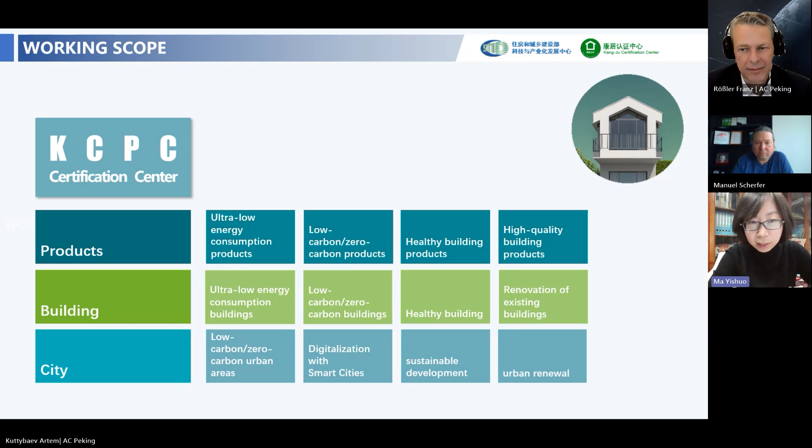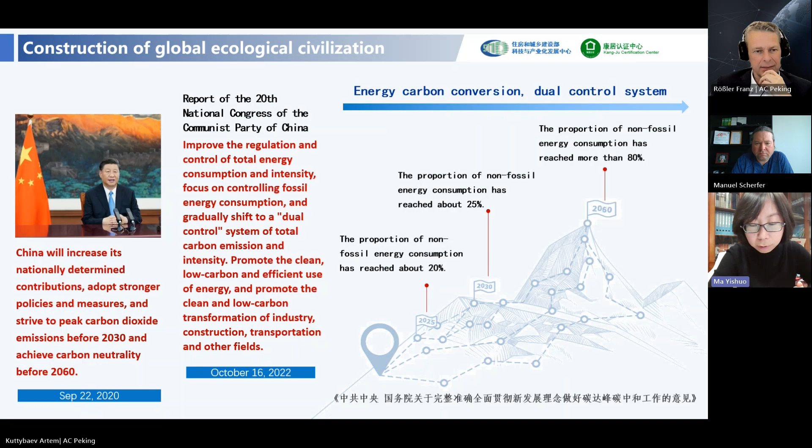From the perspective of the country's development situation, China is an important participant, contributor, and leader in the construction of global ecological civilization, and has proposed the strategic goal of carbon peak and carbon neutrality in 2020, putting forward quantitative targets such as the proportion of non-fossil energy consumption.

Specifically in our industry, the carbon emissions from the entire construction process are 5.1 billion tons of carbon dioxide, accounting for about 50% of total national carbon emissions. The carbon emissions from building operation are 2.2 billion tons of carbon dioxide, accounting for about 21.7% of total national carbon emissions. Therefore, the carbon neutrality target will unavoidably be decomposed into the construction field.

So I think building energy efficiency is a key driving force for achieving carbon peak and carbon neutrality. I cite right here three words: trend, effectiveness, and quality. I think energy efficiency is a big trend of construction development in China, but we have to make it very effective - that means we must not just say it, we must do it, and do it to a high quality.

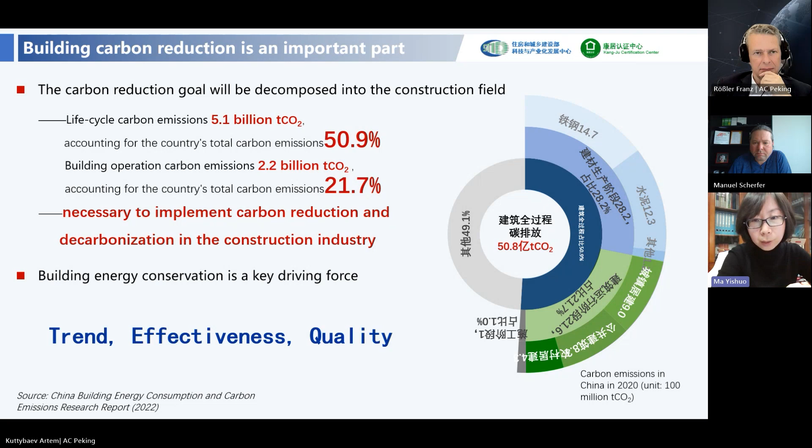Our Kang-Ju Certification Center is the earliest and most important leader and promoter of ultra-low energy consumption buildings in China. Since 2011, under the witness of the governments of China and Germany, we and the German Energy Agency, as the executing agencies of both sides, have been promoting the development of ultra-low energy consumption buildings in China. In 2013, the first batch of demonstration projects began to be implemented.

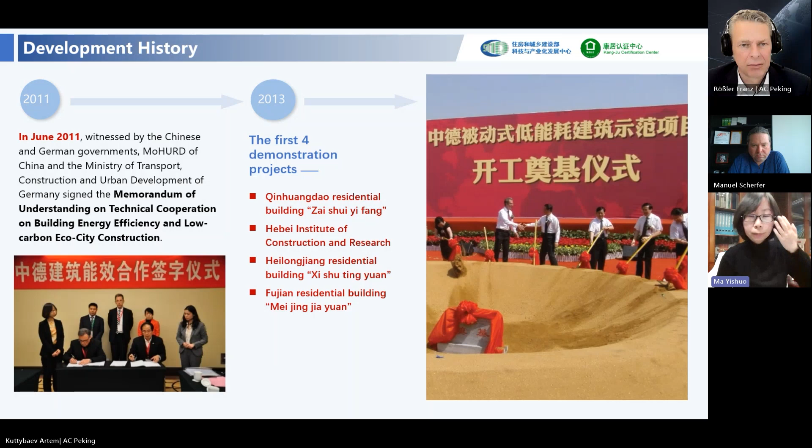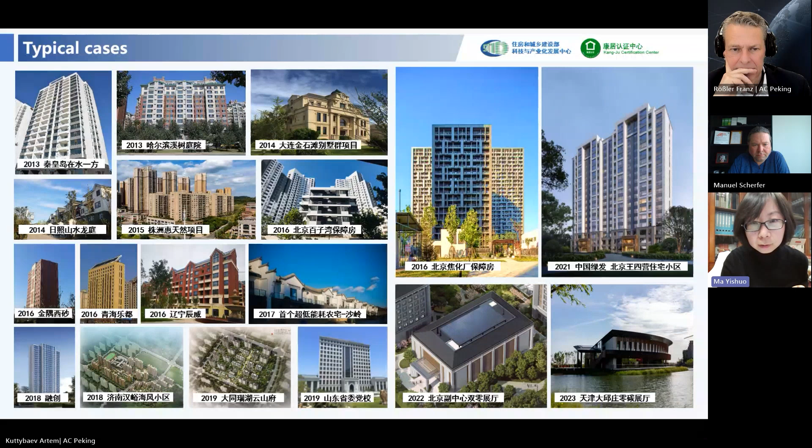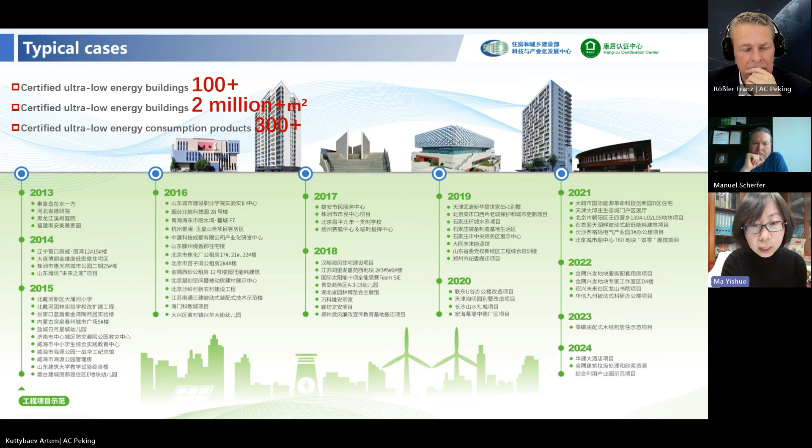So far, we have built over 2 million square meters of ultra-low energy consumption buildings and certified more than 300 products suitable for this kind of building, achieving significant development in policies, standards, technologies, and products.

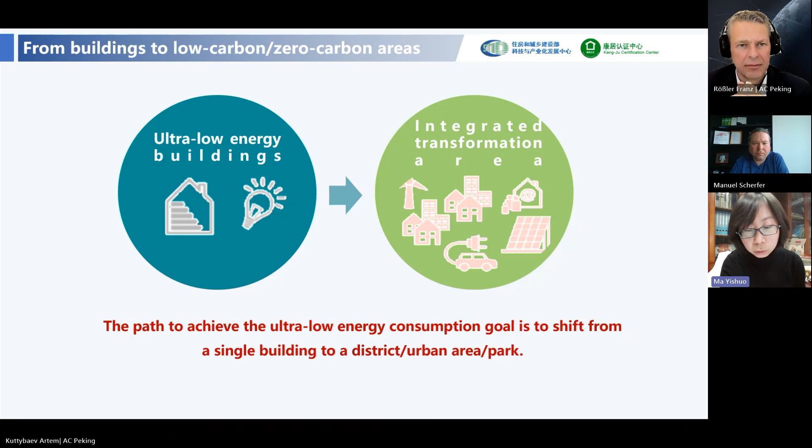With the technological foundation of our 15 years of high energy efficiency buildings, the current trend of low carbon development in China is to focus on urban areas. That is, the path to achieving the low carbon target has shifted from individual buildings to urban areas.

In January last year, Xiong'an, a new city in Hebei province, announced the construction of a model city for green development. In February last year, the Beijing Urban Subcenter in Tongzhou district announced that it would be built as a national green development demonstration zone. Subsequently, in August, the Sino-Singapore Tianjin Eco-City in Tianjin announced its intention to be built as a national green development demonstration zone as well.

It is worth mentioning that starting from 2022, in order to promote low carbon development, the MoHURD and Hainan provincial governments jointly established the Boao Zero Carbon Demonstration Zone.

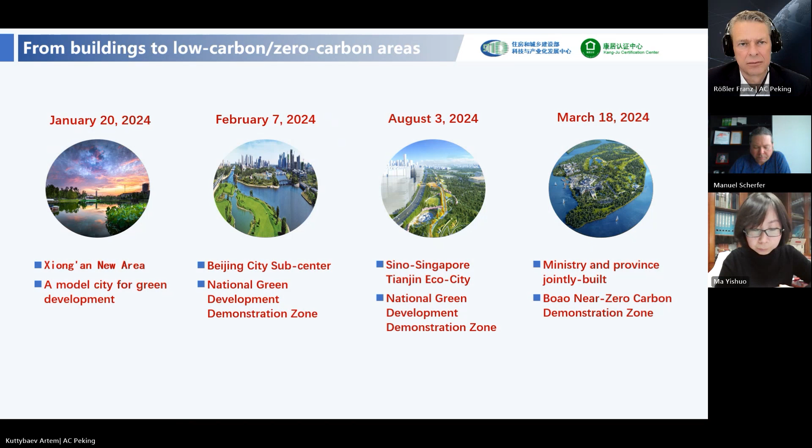The demonstration area in Boao includes Dongyu Island, an organic fruit and vegetable supply base for agriculture and photovoltaic complementation outside the island, a material recycling treatment facility, and 2 green transportation connection stations. Following the 4 major construction concepts of regional near-zero carbon, resource recycling, natural environment, and smart operation, 8 types of low carbon technology integration have been carried out.

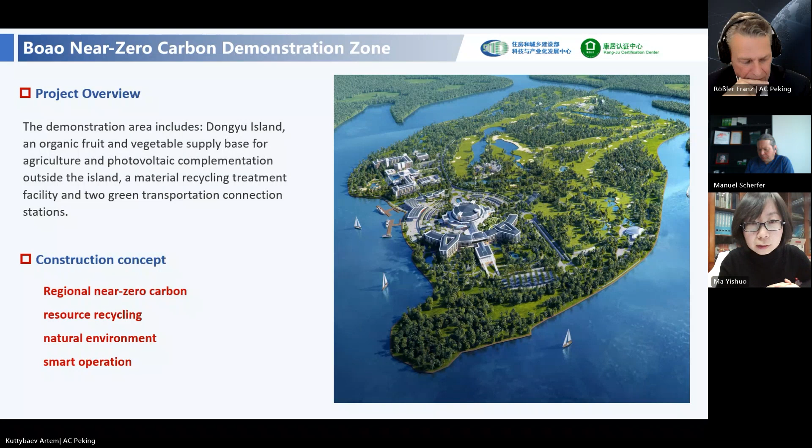18 renovation projects have been completed, including ecological transformation of garden landscape and low carbon renovation of buildings, utilization of renewable energy, construction of new power systems, green transformation of transportation, treatment of solid waste resources, recycling of water resources, and intelligent operation.

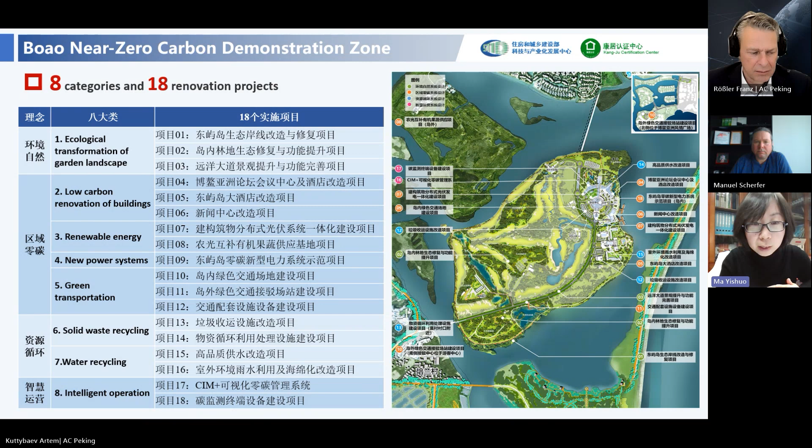After 2 years of construction, the Boao Zero Carbon Demonstration Zone officially entered the operational phase on March 18, 2024. The operation results show that the total renewable energy generation on the island exceeds the total electricity consumption, and the island's power generation can not only meet its own needs but also transmit electricity to the grid.

On March 18, 2025, the working group of Boao decided to change the name of Boao Near Zero Carbon Demonstration Zone to the Boao Zero Carbon Demonstration Zone.

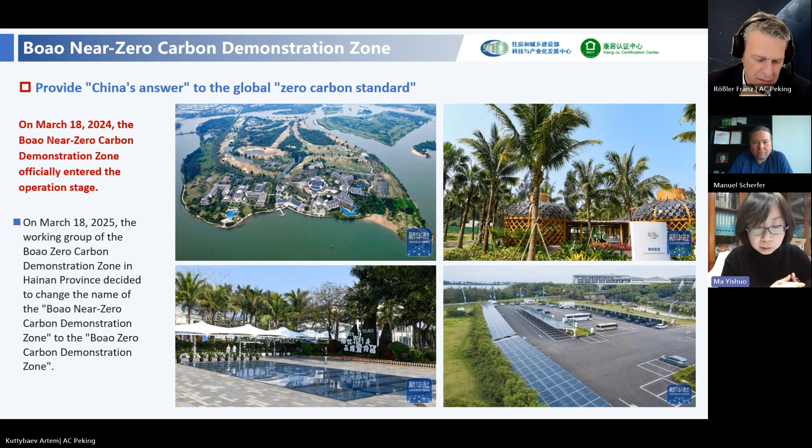In summary, under the background of carbon neutrality, there are 4 development trends in China's urban and rural construction. One is to move from simply improving building energy efficiency to comprehensively enhancing building quality. The second is to develop from ultra-low energy consumption buildings to zero carbon buildings. The third is to shift from new construction to existing building renovation and carry out ultra-low energy consumption renovation for a large number of existing buildings. The fourth is the transformation from individual buildings to integrated low-carbon urban areas.

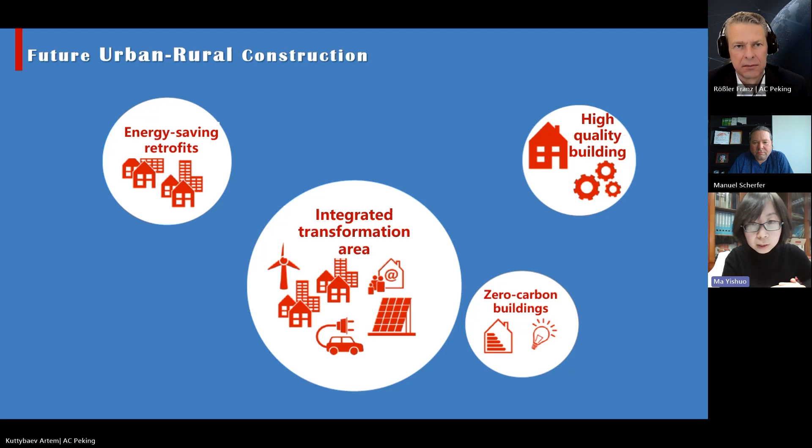In the end, carbon neutrality is China's national strategy and a necessary path for sustainable development, with the transformation of urban energy becoming an important driving force for a new round of technological renovation. We believe that green and low carbon development is also an important driving force for urban and rural construction. That's all. Thank you.

Great presentation, Dr. Ma. Thank you so much. I didn't know 50% is the CO2 emission of the building sector in China. I think we're all in the same boat.

In Europe, we're also talking about districts, not only looking into buildings anymore. Building renovation is a big challenge in Austria and in China too. But it's so good to have Dr. Ma, someone who really opens the doors, shares her experience, and is interested in the best available technologies and cooperation.

For that, we would really like to thank you, Dr. Ma. So now we've got the general big picture of what China wants to achieve and what it has done so far. Now we're going to nail it down a little bit more, how that really works in practice. Mr. Manuel Scherfer will tell us more about energy efficiency design and construction in China, and also share some concrete project experience with us.

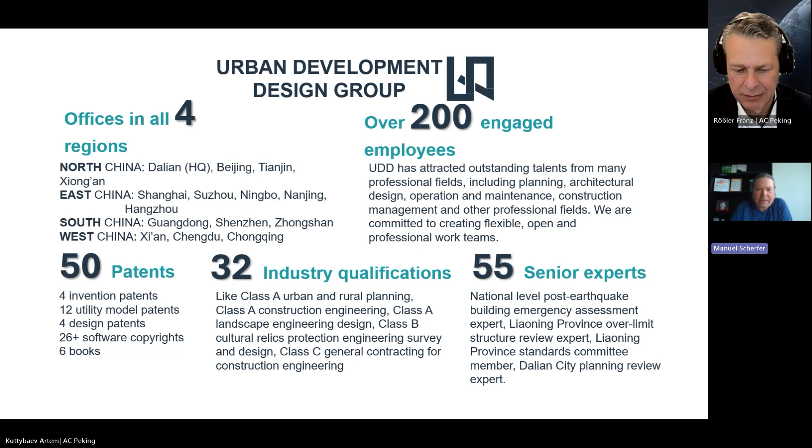I have the obligation to give you a short company introduction. Urban Development Design Group has offices all over China in all 4 major regions, but the headquarters are in Dalian. Dalian is in northeastern China, but I myself, as I mentioned, am just next to Shanghai.

Our company UDD started in the early 2000s, when it was privatized just as a really conventional design institute. Then in the 2010s, we turned into a full-fledged EPC provider, a turnkey service provider. And now the next step for the company is to become a zero carbon building technology company, meaning that in all our projects, across all the different sectors, we will put in as much zero carbon design and energy efficiency as possible.

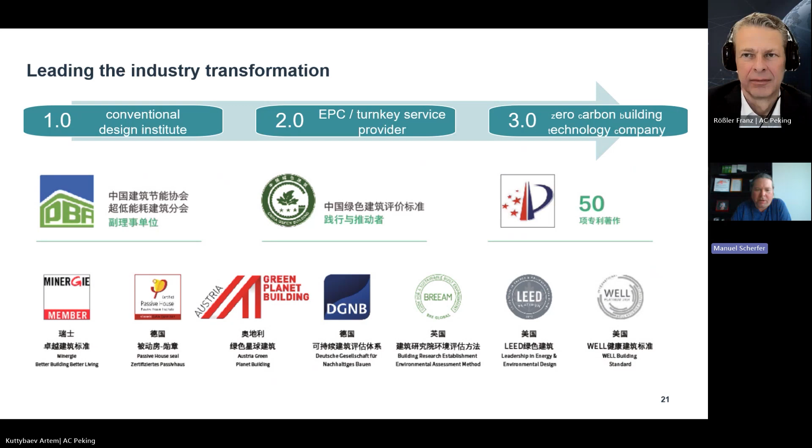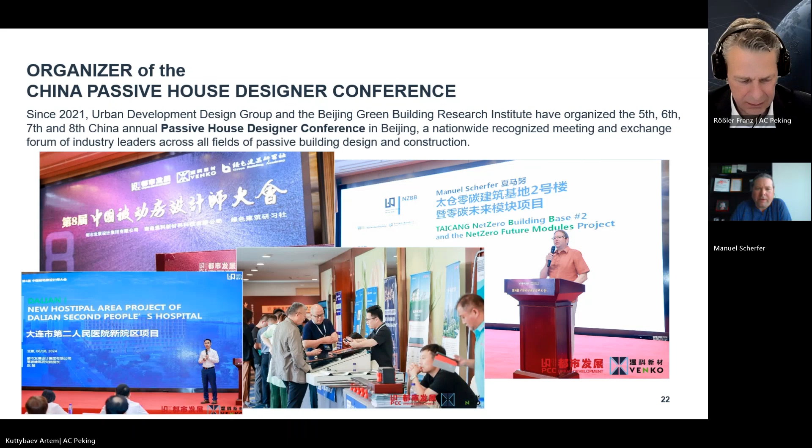We also organize the Chinese Passive House Designer Conference once a year. The next one will be, I think, in November in Beijing. So, so much for the company.

Next is a short introduction of the building I'm sitting in right now. That's the NZBB number 1. NZBB stands for Net Zero Building Base — that's a big name, Building Base, because this site consists of 2 buildings, but only number 1 has been built so far.

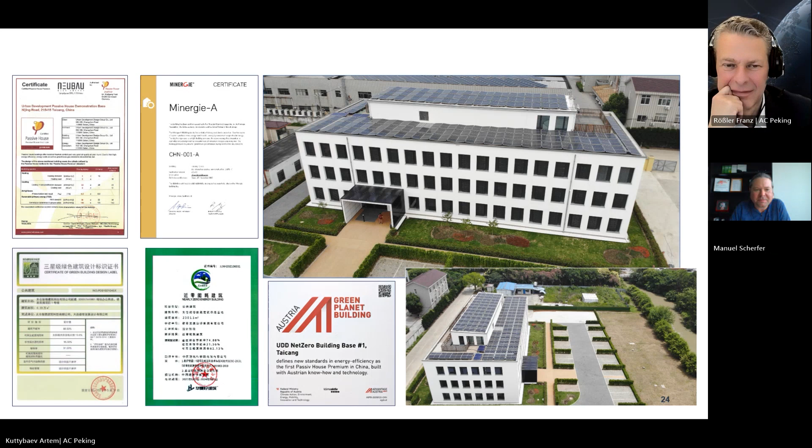I'll give a short overview of some of what I consider core energy efficient technologies, or design principles, that we fulfilled here in this building.

I'll hop through these pretty quickly because for a European eye, this is quite run-of-the-mill and standard, but not so in China. This here is now our plot from above.

The first item here has nothing to do with energy efficiency, but with water conservation, because this whole area is a sponge city. All the water is kept on the plot in the soil, all the surface is water permeable, and where you can see the three arrows, the colors changed a little bit. In my presentation those were blue, but they are all drained, running into a 60 cubic meter cistern. From there they go into a smaller cistern where this water is filtered, and then it is brought back into the building and serves as water for flushing the toilets. That is rainwater reuse.

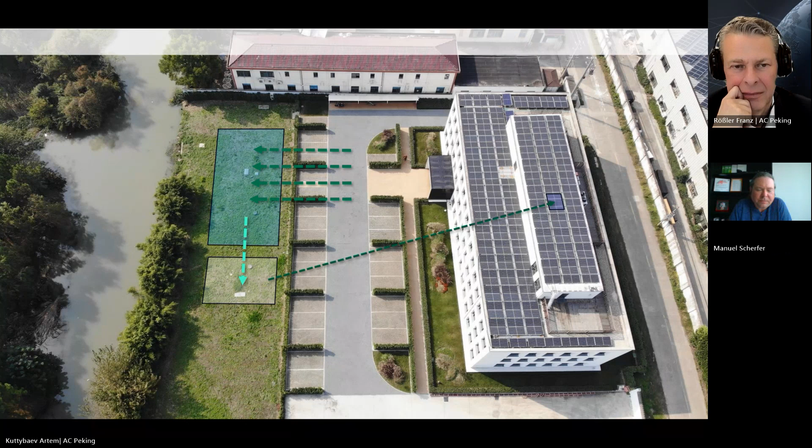Our exterior walls, that's also pretty standard, a classical ETICS system. We have 200 millimeter AAC walls, so that's foam concrete with EPS insulation in two layers, 200 plus 150 millimeters, and this brings us U-values of the main building of 0.086, and the technical room on top of 0.16 watts per square meter Kelvin.

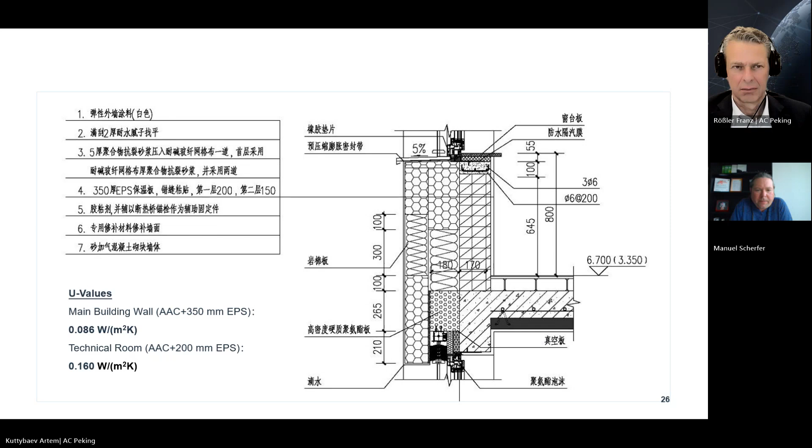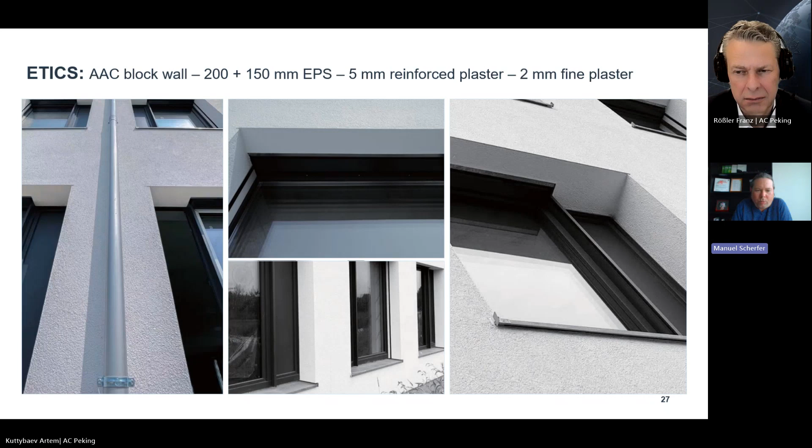This is a more detailed look where we put special attention during construction to have all the design details also put into place, like these strip profiles. If any of you have been in China before, these kind of exterior wall systems are not often seen, and not in this quality. We're pretty happy, and it's still white, as maybe not the first day, but the third.

Heating and cooling is done with a TABS system, a thermally activated building system. This is also quite standard, especially in public buildings in Europe. We have 250 millimeter strong concrete floor slabs. Right in the center are water pipes, fed with cold water during summer, warm water during winter. What makes them so energy efficient is the relatively low temperatures during winter. The supply water temperature is given as 30 degrees, but actually it's more like 27, 28 during winter. In summer, where we have the most energy demand for cooling, the supply temperature is 18 degrees, and we cool down to a room temperature of around 24 degrees. So this small delta makes it energy efficient.

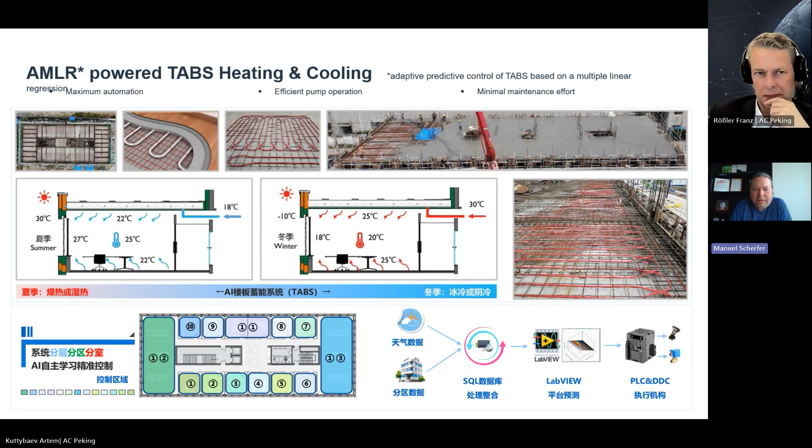The other specialty here is our control and steering system, an algorithm that predicts what each of these TABS zones, each pipe of a single office space, needs for the next day. The circulation pumps run only for a few hours, 3, 4, 5 hours, and then it is turned off. For the rest of the 10, 12, 13, 14 hours, it's just passively radiating heat or absorbing warmth during summer. That's how we gain a lot of energy efficiency.

Let's look into our technical room. Then we have the AHU, the air handling unit, designed for our climate here. I have to specify a little bit - we're in what in China is called the climate zone of hot summers and cold winters. But cold winters here means we have a couple of weeks during winter where it's around 0 degrees, maybe sometimes -3, -4, -5, but usually it hovers around 0 degrees. So that's given as cold here, not as cold as in Austria or Germany.

The outside air, shown by the green arrow, comes in and passes through the first heat recovery rotor. In summertime, with say 35 degrees air temperature, this will pre-cool it down a little bit. Next is the cooling coil, where dehumidification happens, which is badly needed here. In summer, even at temperatures around 35 degrees, we still have relative humidity of the outside air over 80%, so a lot of water has to be removed. We then get very dry but also very cool air, only 12 to 14 degrees Celsius. We heat this air up again, also using the return air temperature, and it comes out of the second heat recovery wheel at around 20 degrees cool air, which is very pleasant. Then we pass this into our offices.

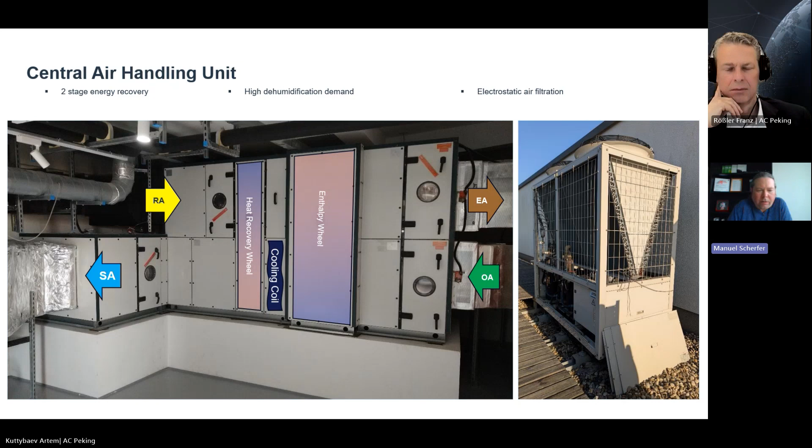Of course, external shading, all fully automatic, also developed by ourselves. And then we have on the left our small weather station, which is important for our TABS control system.

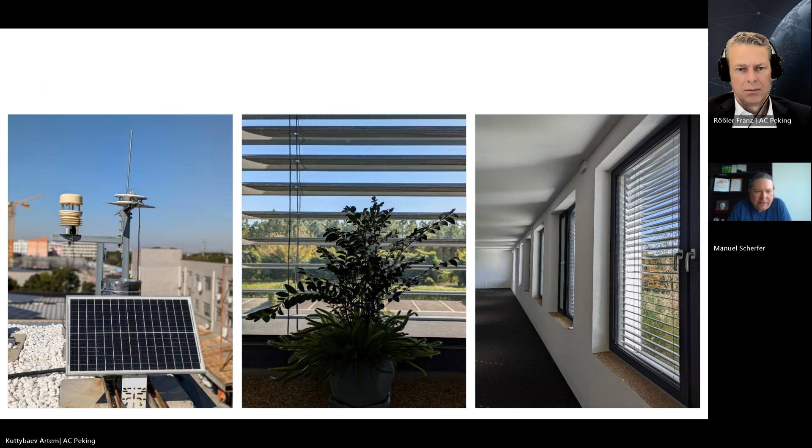Now the third point: this building has been in operation for about 2 years, a bit more. We built it during COVID with more than 80% locally sourced materials, technologies, and construction workers. So it is not like in the past that these high performance buildings need to be very expensive and need a lot of imported foreign technology. The China market can now provide most of these, and in very good quality.

So the question is often, why are not more buildings built like this? And a lot of buildings are just not like this. And why? I scratched my head, and then I found a document.

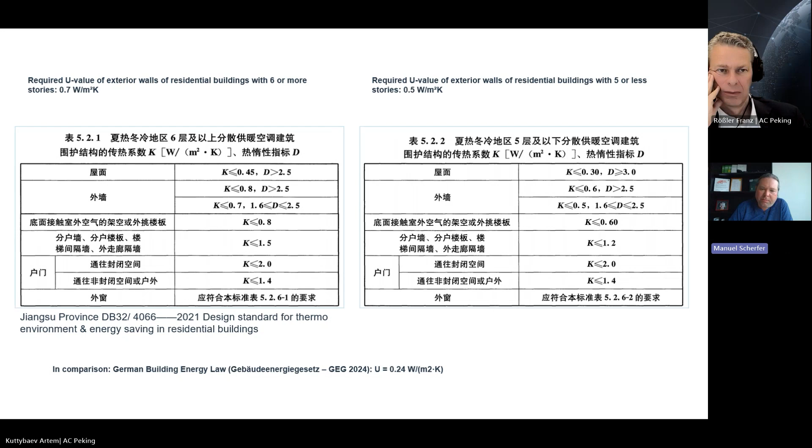If we compare it to the current German building energy law standard, which is the baseline in Germany for new buildings, the U value has to be 0.24, so much lower. But anyway, in China, at least small buildings 0.5, or higher buildings 0.7.

The other figure is the U value required for windows, which I picked out. There are a lot of numbers, but in general these have to be at least 1.8 to 1.6 or lower. So it is not a very high target, to be honest. Again, the German standard requires 1.3.

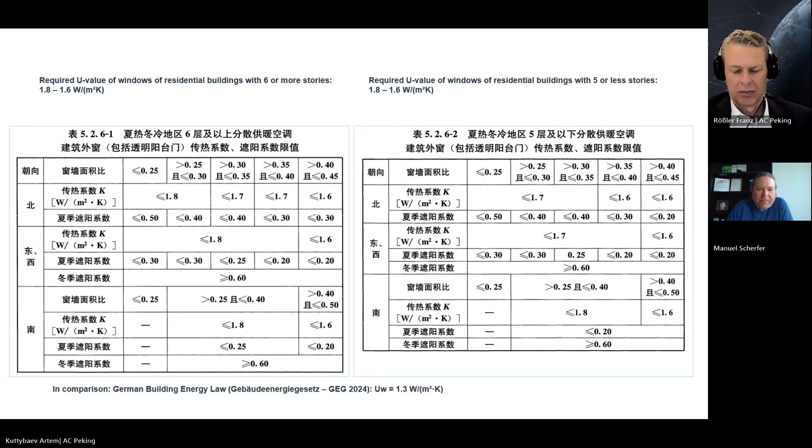So how can this be? What they currently do at this construction site is finish the exterior wall with aluminum cladding, so there will not be any insulation.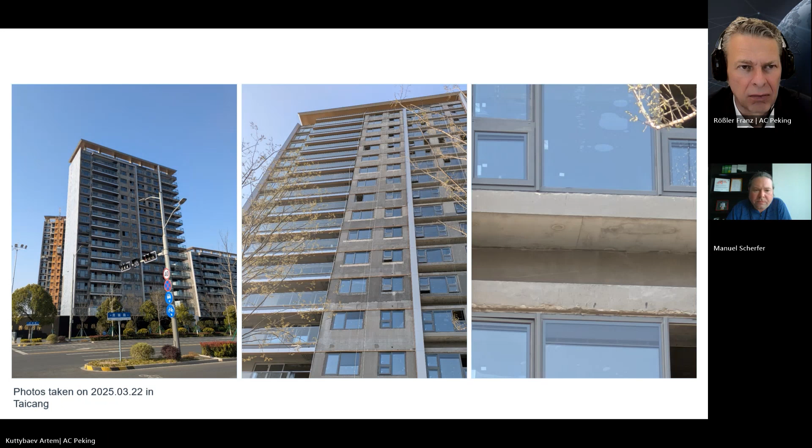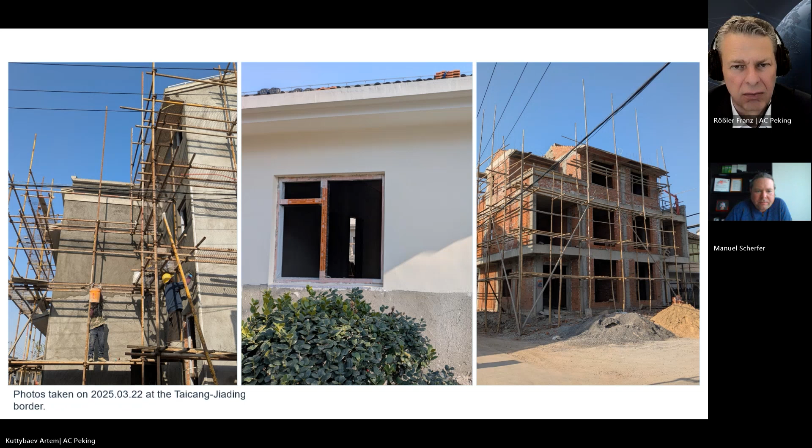So the question is, there might be a possibility - it could be a really thick, massive wall. With growing thickness, you can reach a U value of, let's say, 0.67 without any additional insulation. But this photo here, if you look closely, surely proves this is a 240 millimeter wall, because that's the length of the brick.

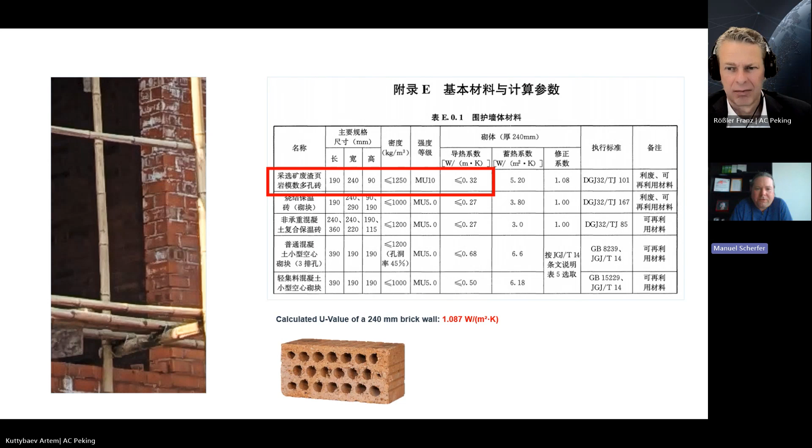I calculated this - I took my PHPP calculation and put it in, and that comes out to a U value of 1.087. So clearly not 0.5, or even 0.7 or 0.8, right?

So the question is, how can these buildings be legal? I asked my colleague, and she said there's one possibility: if a local standard is more strict than the national standard, someone could opt for the more lenient national standard. But that's just hearsay. Next, please.

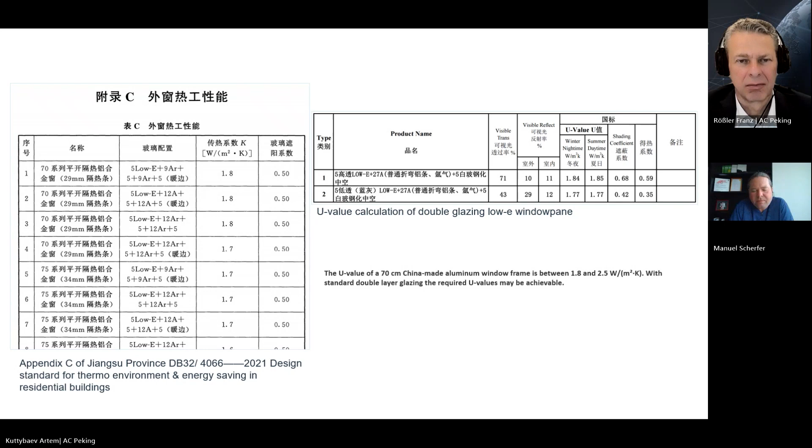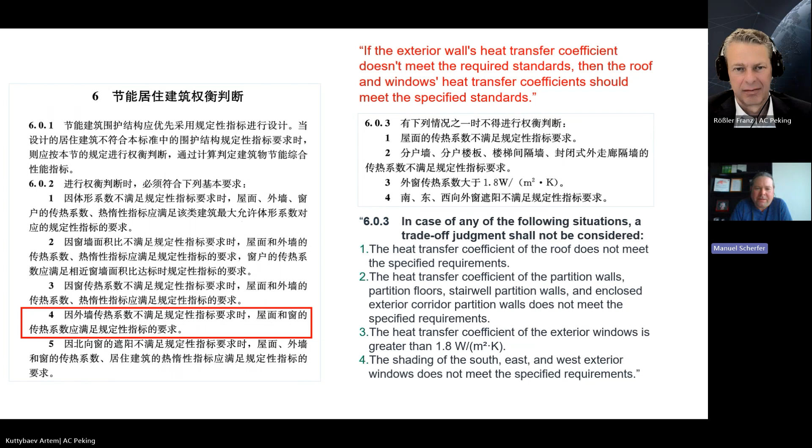Yeah, and that leads still to the question - the standards are there, the requirements are there, but how people find these loopholes to circumvent them, I just have no clue. The colors here are a little weird - they were different in my presentation, but it doesn't matter.

I have a couple of friends who bought new apartments, 2 or 3 years old. They all have nice amenities like ground heating and fresh air systems - everything nice. But during winter, the apartment doesn't get warm. During summer, it doesn't cool down. And the heating and cooling bills are about the amount you would pay in Germany, where we have 5 times higher energy prices. That's the reality.

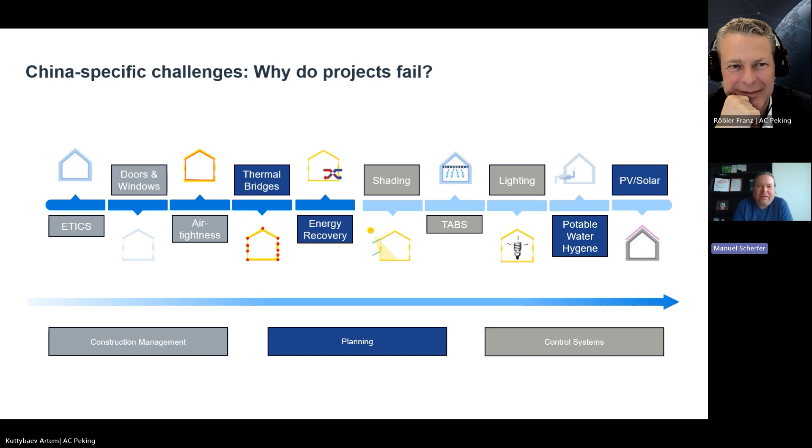If anyone has an idea how to correct that, I'm eager to hear. But I hope we have a lot of discussions later on. You can find me by email. We can have a virtual tour here in this building and continue the conversation. I thank you very much. Next slide, but that's only the bye-bye.

Thanks so much, Manuel. So where is the regulation side you portrayed - but in reality, maybe also like in Austria sometimes, but in reality it looks quite different, you know. It was very, very interesting to see this first-hand experience of building projects.

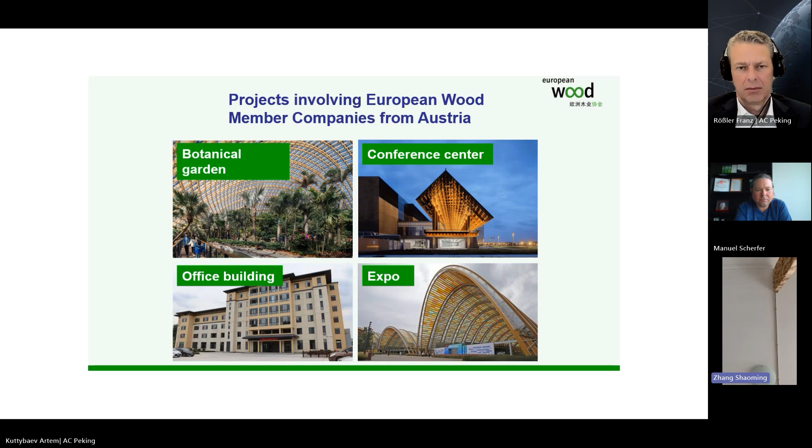Some scales are even bigger than some European countries. I mean the highest and the span, like the last one, the Expo, it's almost 120 meters span, very, very long.

Just some detail, have a close look at some of the projects I mentioned. On the last page there's the office building in Shandong.

This is the botanic garden in Taiyuan. It looks very attractive, and reportedly has a lot of visitors every day at this site. It's a very large span glulam structure.

There's the Expo project just finished 3 years ago by Austrian companies. It's a fire pavilion, very interesting and nice looking, with many visitors every day. With these projects, we cannot leave out the support of code and standards.

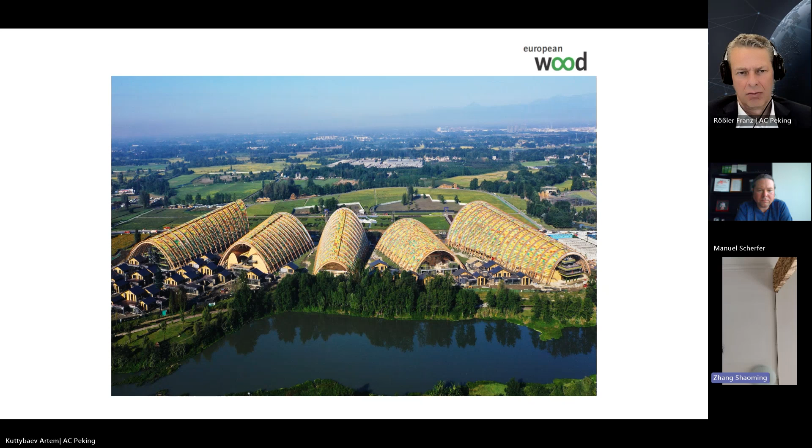So the most important code standard is the fire code. Fire is the key and also the bottleneck for the development and promotion of wood construction in the China market. The new revision, actually the draft, has been finished for 4 or 5 years, but it has not been published, so we have been waiting for that. I hope this year it will be issued and published by the government.

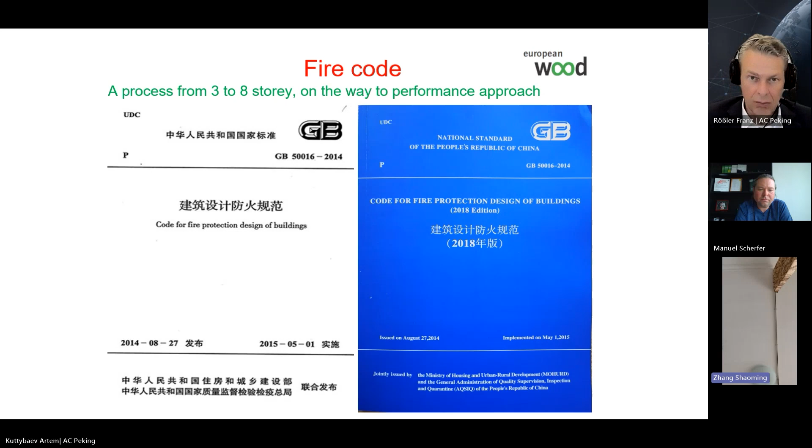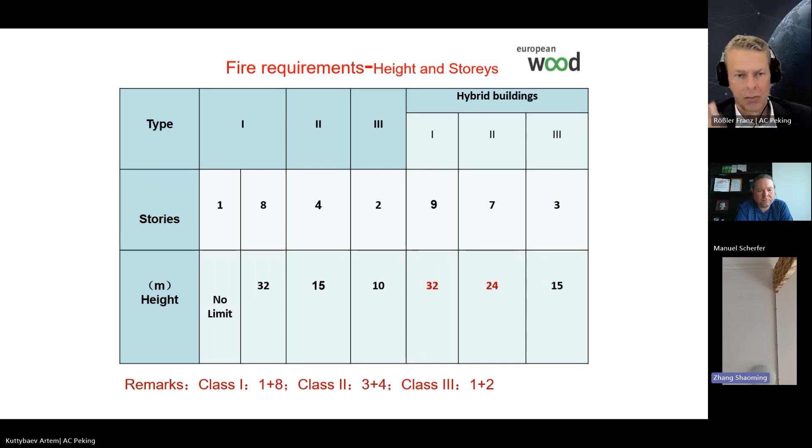So far, the main applications of wood construction in China are for several types: residential buildings, leisure and resort buildings, and complex buildings. We call this part of the public buildings, and this part has been increasing greatly, and at the moment it's the largest part for wood construction. There are also education and sports buildings, and traditional buildings like churches, pagodas, and temples, etc.

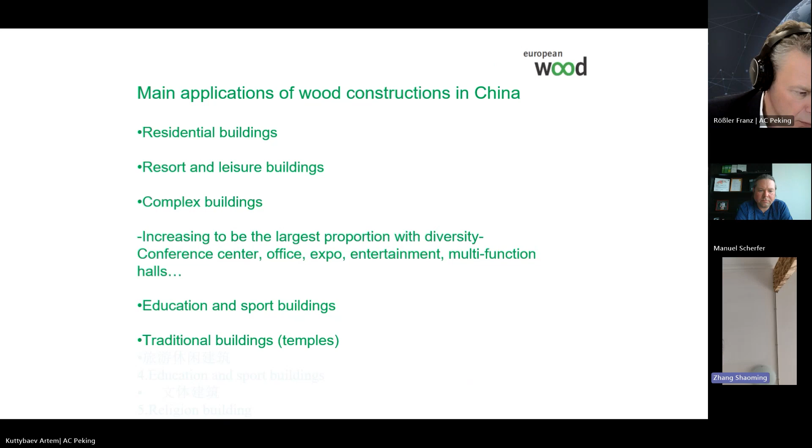We can see that multi-story and high-rise wood construction is still missing, it is in an early stage in China because of barriers and fire regulations. In Europe we use CLT for multi-story and especially high-rise, but the CLT standard in China is not finalized yet. We hope that will come very quickly.

Because of the carbon pressure for China, the government and industry are making efforts to seek new solutions via low carbon prefabrication, hybrid, safe, low energy, green, intelligent, comfort, etc.

Just last month, very important policies and standards were issued by MOHURD. One is that the residential building standard is issued, meaning all residential houses will have to reach high standard and high quality. For example, the height must be more than 3 meters and more suitable for old people. There are some other requirements and properties that will be very good for timber applications.

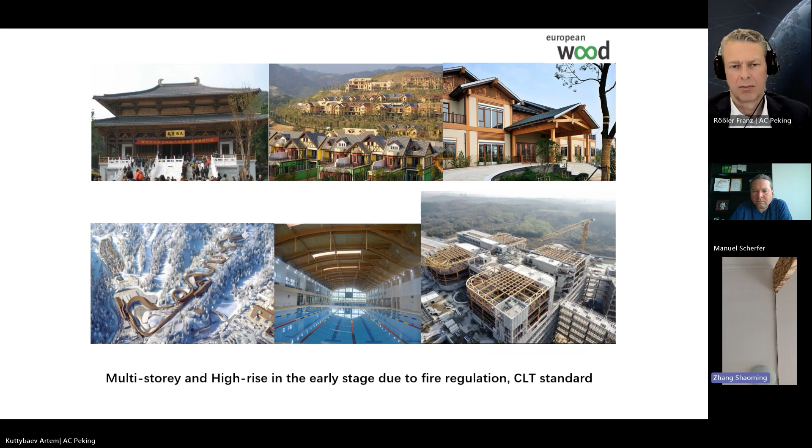So it is a good opportunity for modern wood construction in China. Next page.

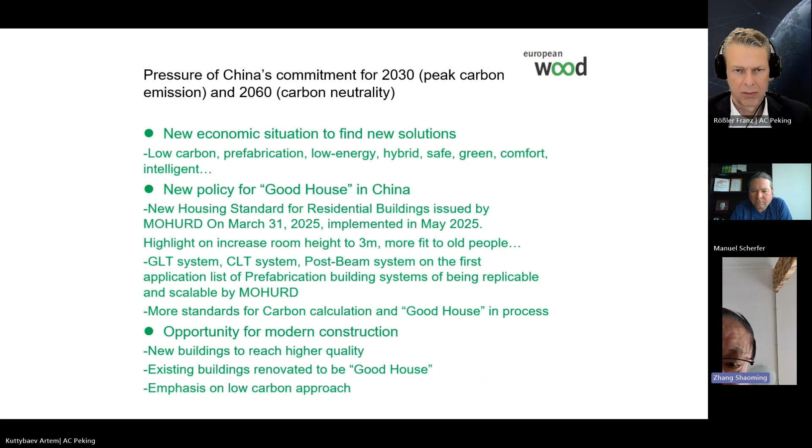This is the last slide, but the most interesting, because under the current economic situation, some leading state-owned giant companies in China...

These giant companies in China have stepped into the market for modern wood construction, like China Construction Group from the building segment, and China Forestry Group from the forestry segment. They are planning more big projects in the China market.

China Construction Group is planning several big multi-story and high-rise residential projects in Wuhan. What I'm showing on the screen is a cultural center in Wuhan by China Construction Group - it's a theater and concert hall complex. I hope this project will become reality very soon.

China Forestry Group has a project of 12-story high-rise buildings in Shanghai. They have finished all the design, and construction, I hope, will be started soon.

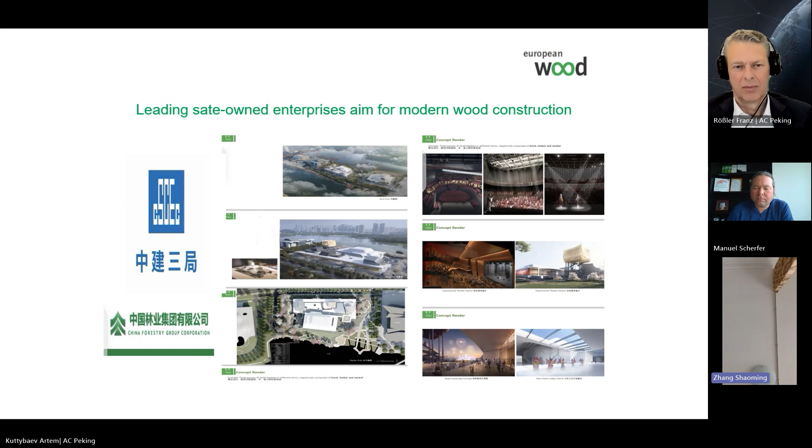Very good summary as well, Mr. Zhang Shaoming from European Wood. This encourages us all, and there are actually several people in the room who are leaders in this field, who have been working in China and are ready to continue. But we need organizations like yours and the ministry.